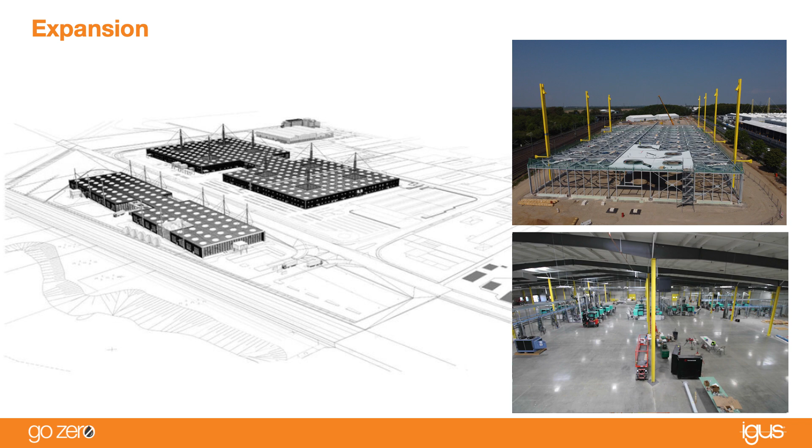We have lots of exciting expansions going on, new production facilities, new storage and warehouses. You can see a video here of a building that we renovated here in Rhode Island. We are going to be molding, and we are molding now, parts here in the United States in Rhode Island, always doing what we can to diversify manufacturing and keep up with demand and reduce lead time for you.

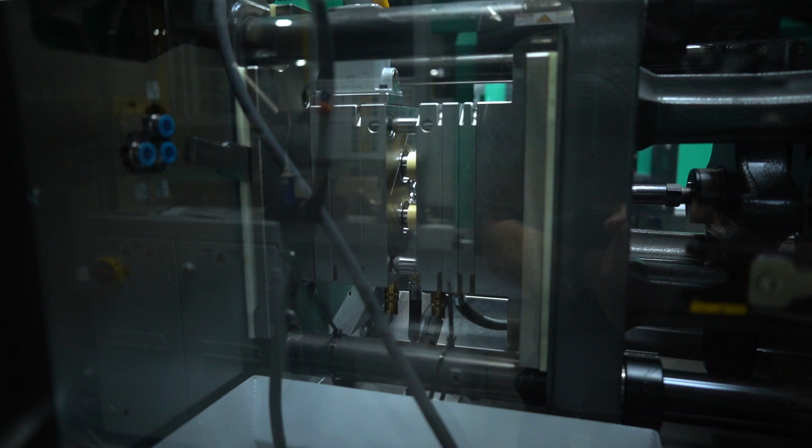Our why, a little bit about our company, our mission: improve all types of motion with motion plastics while maintaining a CO2 neutral footprint with zero plastic waste, and be the easiest company to work with.

As we go through this webinar, please think about pain points and design challenges you've had, especially around movement in your designs. This could be around accuracy, material selection. Cost is obviously a big factor. Wear and longevity throughout your product life cycle, miniaturization, things are getting smaller, noise, vibration, power efficiency—all things that in your day-to-day work as an engineer, you've had some challenges around.

Because that's what we want to try to solve: improve motion. We can help you solve those problems. We just need to know what they are. We just need to have that conversation and understand what you're seeing.

So how do we improve motion? Self-lubricating, no external lubrication required. Corrosion resistant, if you're going to have any wash down, any chemicals. Lightweight, quiet, high wear resistance with a low coefficient of friction throughout the life of this material, and resistant to shock, edge loads, very vibration dampening.

We mentioned CO2 neutral—we take that very seriously here in Rhode Island and in Cologne. So energy savings initiatives, recyclability, our goal to be CO2 neutral by 2025.

And maybe most importantly, easy to work with. We are serving you, you're our customer. We have online configurators, free samples if you're testing or trying something new, predictable service life, and product and industry support.

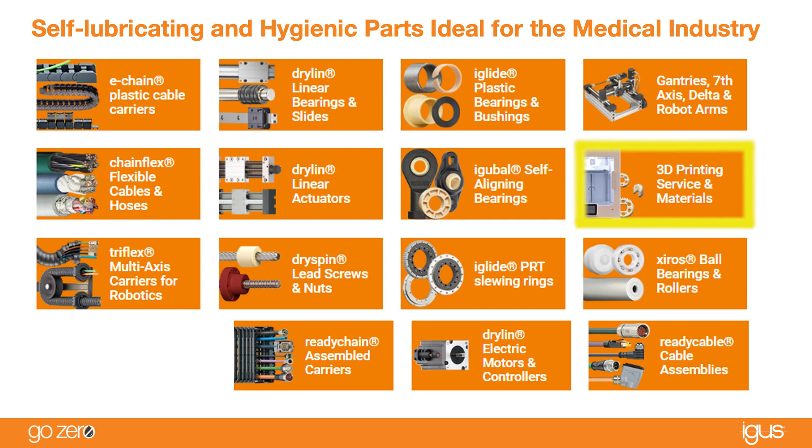dryspin, these are going to be our lead screws, similar to a ball screw for linear motion. Ball bearings for higher speeds, spherical bearings for self-aligning applications, and 3D printed parts. So again, that is very quick, but essentially any mechanical component you can think of where maybe you would consider using a metal part, we offer a polymer solution to that.

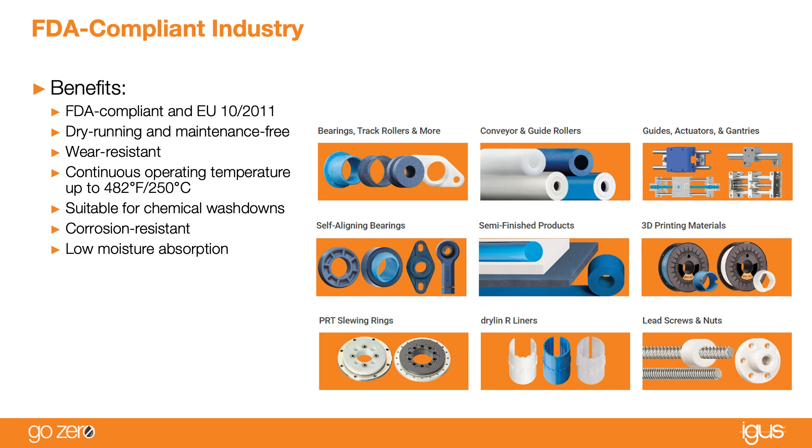We also have a lot of FDA materials in most of our product groups as well. So if you have those FDA regulations that you're trying to hit, or it's going through wash down, being sterilized with a lot of chemicals, we have those materials ready. We also have clean room solutions available as well, up to class 1.

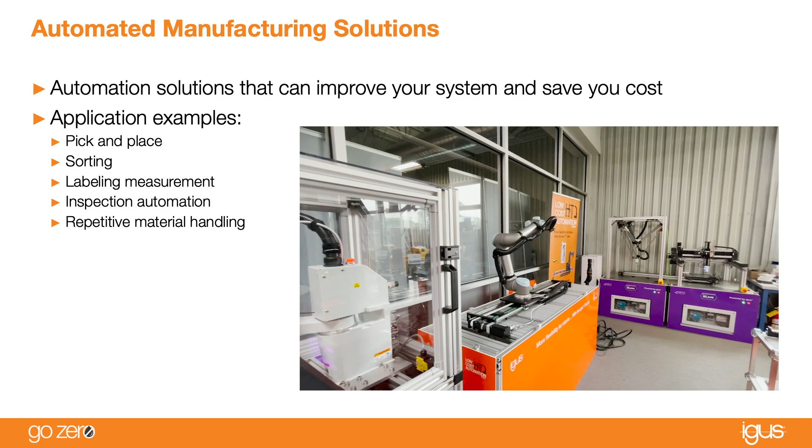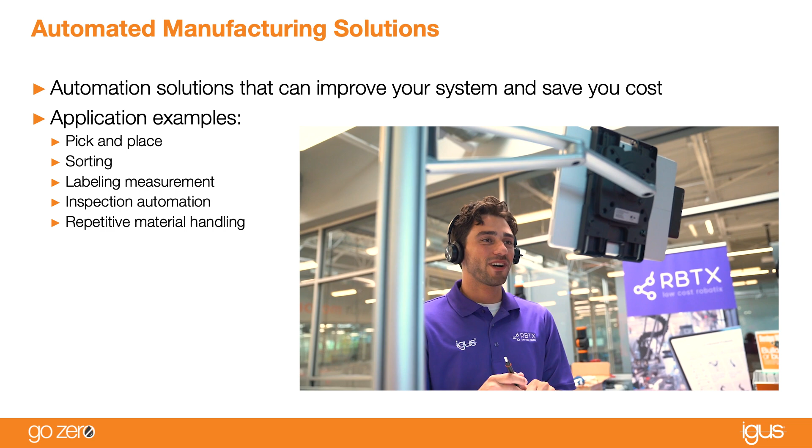The last product group I want to mention is our low-cost automation and our RBTX website. So automated manufacturing solutions, affordable automation solutions, including robots, actuators, gantries, control systems. Common applications are pick and place, sorting, any kind of low duty cycle. These are all made from our standard components, all the same self-lubricating benefits, very hygienic, cost-effective, and scalable. So the idea is we can get you into automation without you having to spend tons and tons of money, and then you can scale up from there.

At igus, we try to be a very innovative company. So we listen to our customers, we listen to their feedback, and we try to implement those changes into our R&D. Last year we had 247 new products.

As we mentioned before, in the medical industry everything is getting smaller, more compact. Your healthcare providers, your surgeons give feedback saying, hey, we need this smaller, lighter. We can help do that. So our new miniature actuators, the SLW 0620, you can get these with a motor on them, with a lead screw, both in anodized aluminum, stainless steel, or anti-reflective black.

We also offer an all-polymer PFAS-free solution as well in those low profile versions. So we're seeing these used a lot in small, compact blood analyzers and applications like that. We're also seeing demand for customers wanting more recycled parts, parts made out of recycled plastics, or maybe they want a CO2 footprint for each component. That's something we can offer - we can tell you what the CO2 footprint is of each component, as well as eco-materials and PFAS-free materials as well.

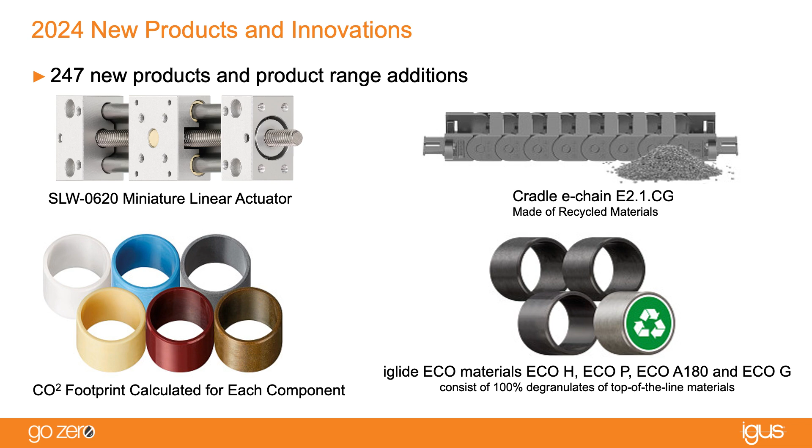So a little about our technology, igus Tribopolymer makeup. We have over 50 materials now that we make components out of. They all start with a base polymer, so that's where they get the predetermined tribological factors, mechanical, thermal, chemical properties of that material.

We reinforce them with fibers to make them stronger. We can handle mechanical loads up to 30,000 PSI in some materials that we have. And then solid lubricants - these are all homogeneously blended together, so the entire part is a wear surface and has that optimized for wear and friction.

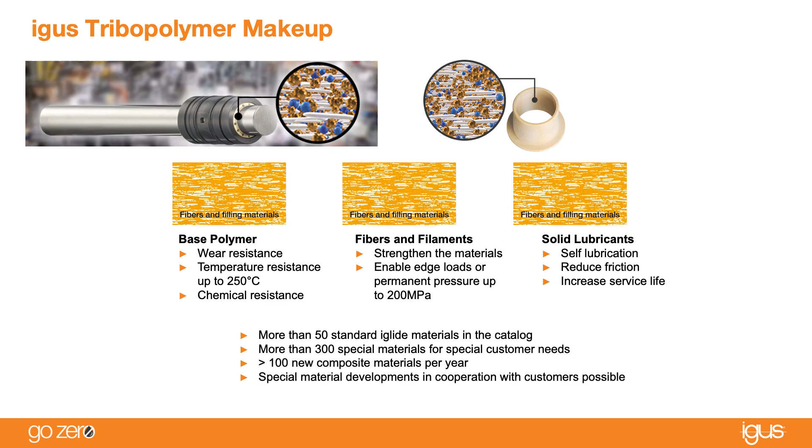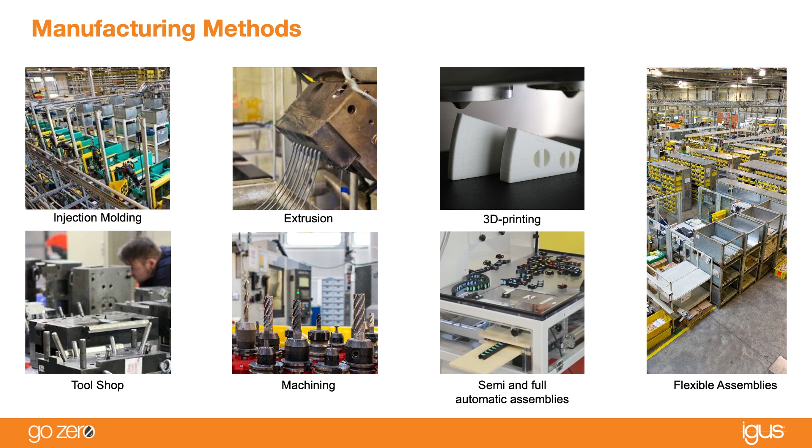Manufacturing methods - a lot of flexibility with the manufacturing depending on your needs and where you're at in your design. So injection molding, serial production, we can keep costs down with our molding. We have raw material that we can extrude in bar stock and plate stock that we can machine into custom parts, or you can purchase and machine yourselves. 3D printed materials, again, of our wear-resistant self-lubricating parts. And then, of course, our machining and tool shop as well.

So custom parts, big in the medical industry, right? You're going to need to tailor things specifically for your customers, for unique applications. We can do soft tools, we can do 3D printing, or we can do the machining. Great for low volume runs or prototyping before you get into production.

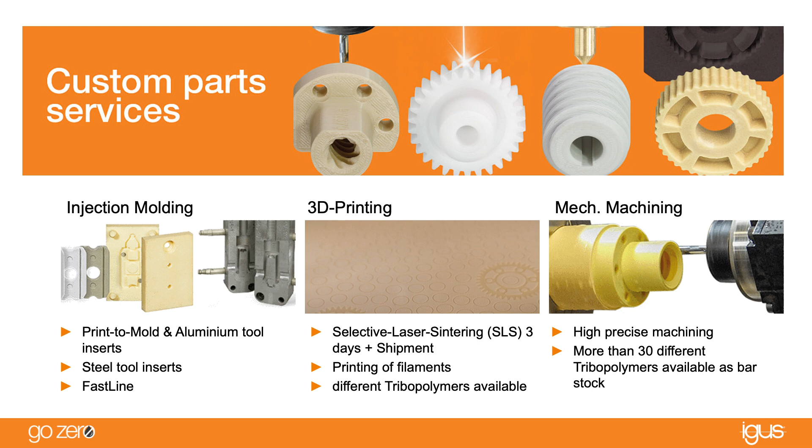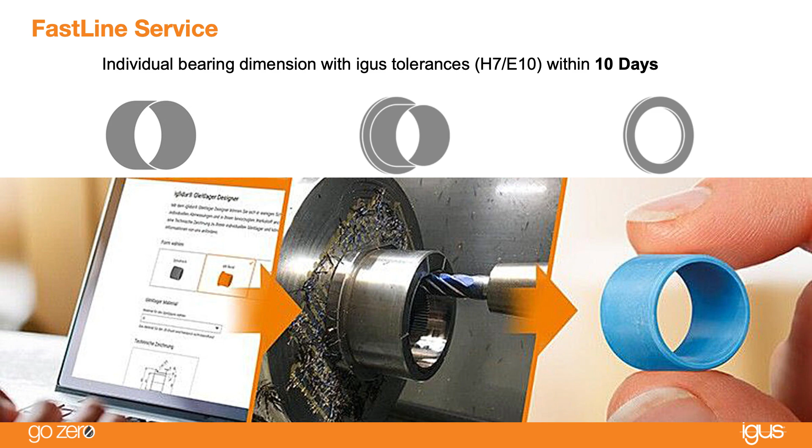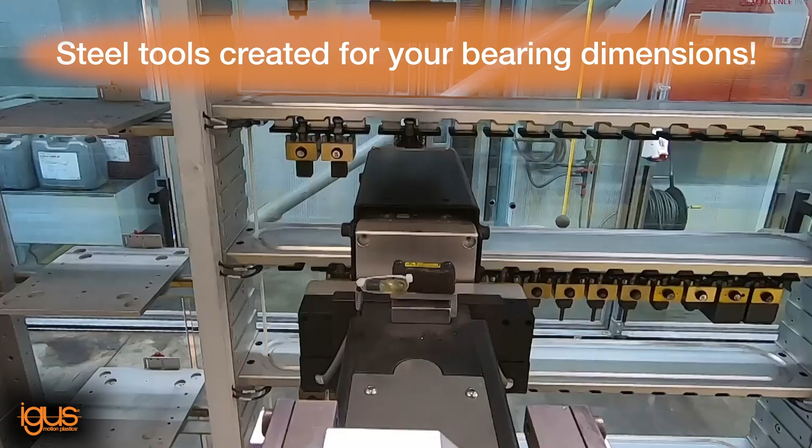And then when you get to production, we can get you to market fast with our FastLine custom tooling. We can get you custom parts - typically this used to take us 16 to 18 weeks. We have automated that process. We can now have you custom parts ready to sample in 10 days. That has been great, especially in the medical industry when you do a lot of testing, you have a lot of design, and then you're ready to go.

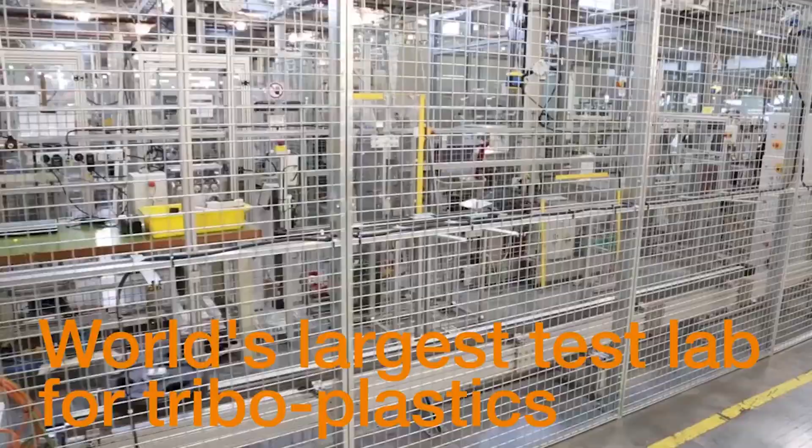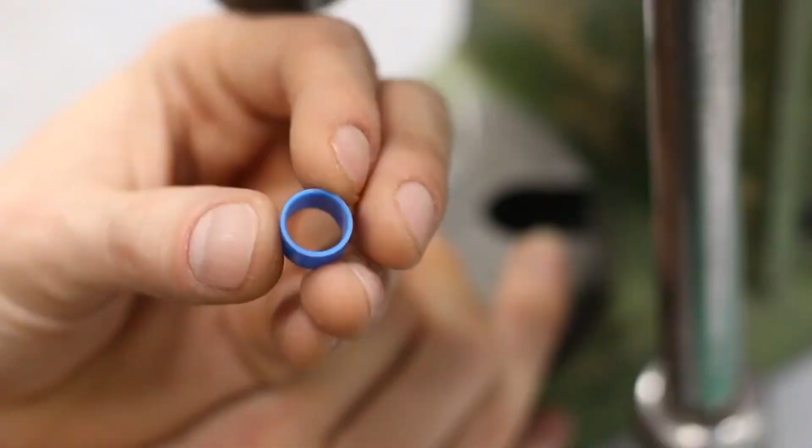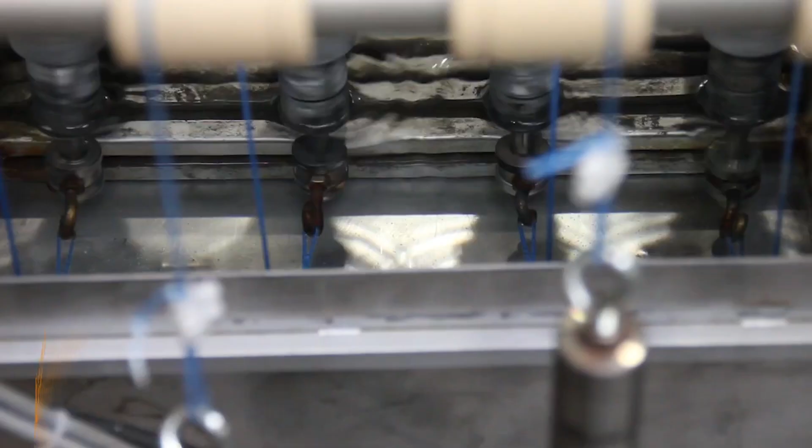When we talk about our materials and the reliability of them, they are tested. When you have high cycle rates, speeds, accelerations, all these demanding environments, it's important that we test. We have thousands of tests that we do every single year in our lab. So when we give you a service life and tell you how long something is going to last, we're able to offer a guarantee on that, and you know that's coming from this lab, not theoretical from formulas, it's actually coming from our test lab. It's the largest tribopolymer test lab in the world, and it's REACH, RoHS, and ISO 9001 certified.

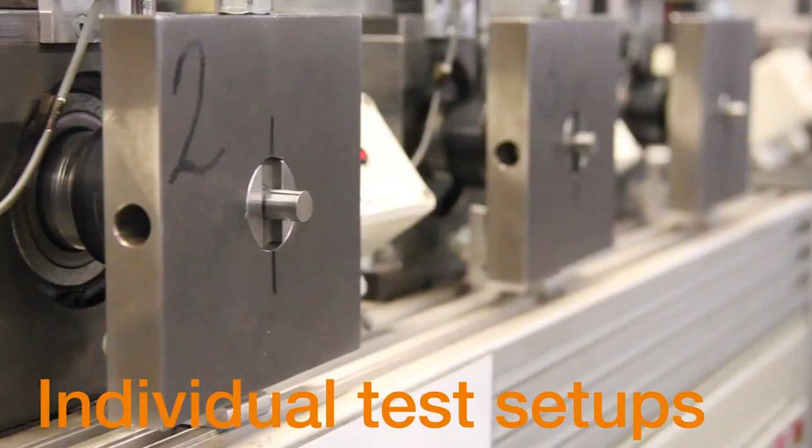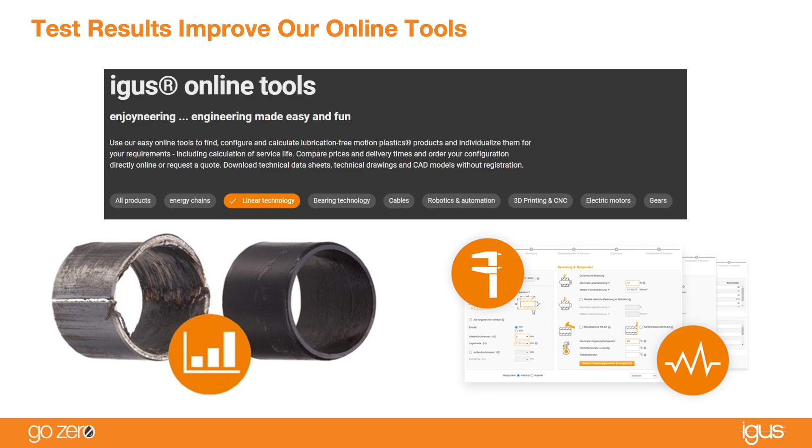All of that information goes into our online tool. All of our components have configurators. You can go on, put in your application information, and we can point you in the right direction and give you a service life so you know it's going to last as long as it needs to.

One of the main benefits we've talked about is eliminating lubrication. There are some obvious reasons for this. Lubrication gets into the environment, gets into the drinking water, and it's responsible for 54% of bearing failures, whether that's lack of lubrication or improper maintenance, as well as the overall cost of lubrication and the downtime it takes if something were to go wrong.

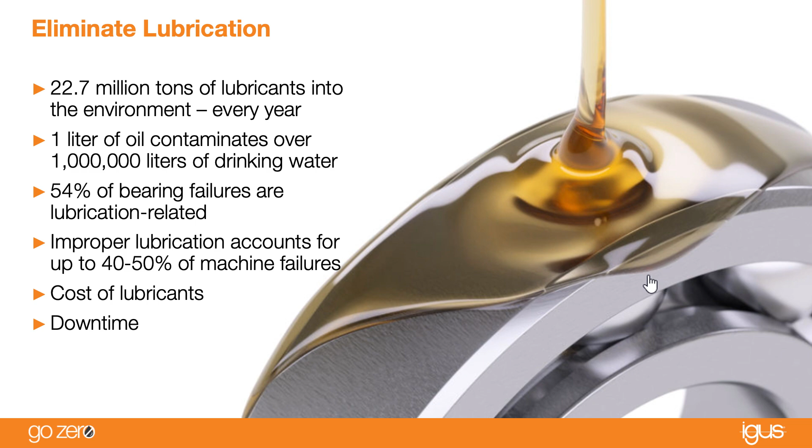Take that out with our self-lubricating hygienic parts, ideal for the medical industry. Dry running, grease-free, maintenance-free, hygienic, low vibration, very quiet—these are all benefits you're going to get, as well as being able to handle high loads and long life, and also be cost effective.

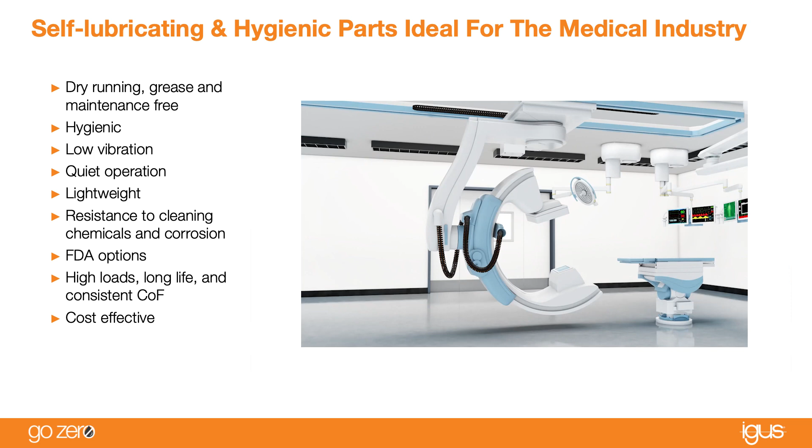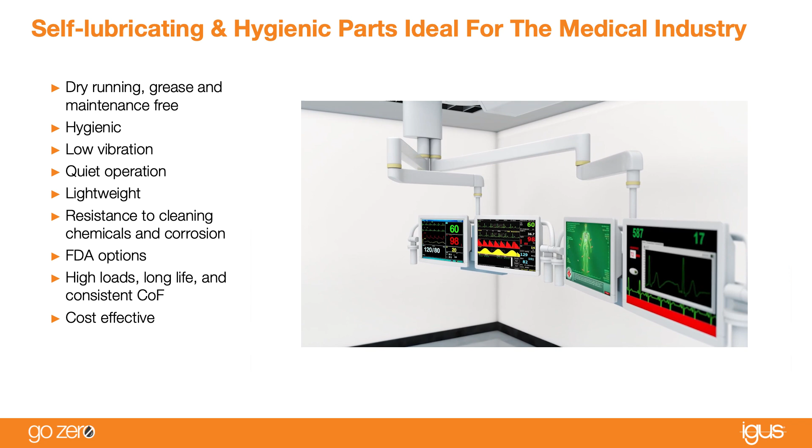So why would you need these? It's going to improve patient comfort and safety, enhance mobility in moving parts, increase efficiency in components, operational reliability, durability, and consistent performance. And of course, cost effective—the parts being molded are going to be more cost effective than machined steel parts, and you won't have the cost of lubrication over time, or the cost of downtime for maintenance.

Medical industry technology, a few application examples. This is going to be very broad because we serve so many different market segments within medical, so please think about what you do specifically and where we might fit in. I'll try to show you some examples—lab and analysis automation, pharma, biotech, clinical.

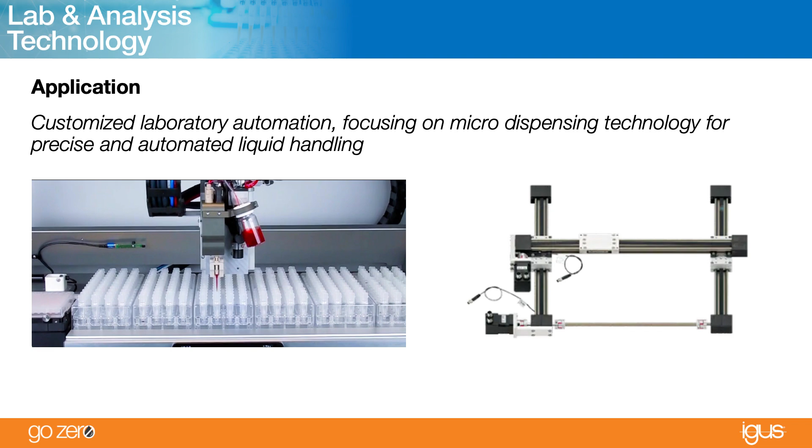This specific one is a customized lab automation, micro dispensing technology. Their requirement is a demanding system with strict chemical, hygienic, and high purity standards, while being compact, efficient, and capable of various liquid volumes with high accuracy. A traditional manual method is very time consuming. With this solution, we're able to be much more efficient with time, but cost effective compared to an industrial application where you don't need that level of accuracy. The system could handle up to 1,400 bottles per cycle, with accuracy of plus or minus 1 millimeter.

Other lab and analysis applications include diagnostic machines such as microtomes, centrifuges, and pipetting robots. They require high speeds, compact, automated designs. With centrifuges, plain bearings can be on the rotor support and motor shaft, and they're also very vibration dampening for compact machines rotating at high speeds.

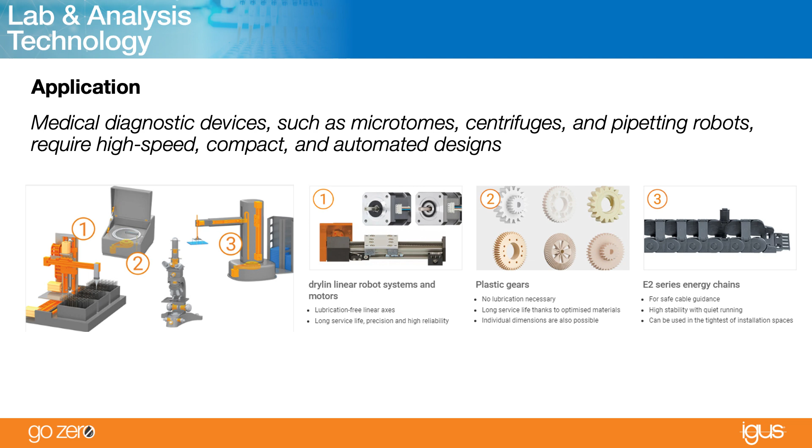Linear motion systems—bearings are commonly used in linear motion for lab automation and equipment, pipetting robots, sample handling, and liquid dispensers, enabling precise and smooth movement, accurate positioning and handling. Pick and place robots, as well as conveyor systems, use bearings as you're moving things along the process. So a lot of opportunity in lab automation.

Medical furniture, functional furniture that's going to be moving—hospital beds. It's important that they're very quiet for patient comfort, with jerk-free movement and easy operation for the providers of side rails, resistant to cleaning and sterilization. This needs to be done with the chemicals, electrostatic charges, a lot of safety involved, and needs to be wear resistant throughout the life of that component.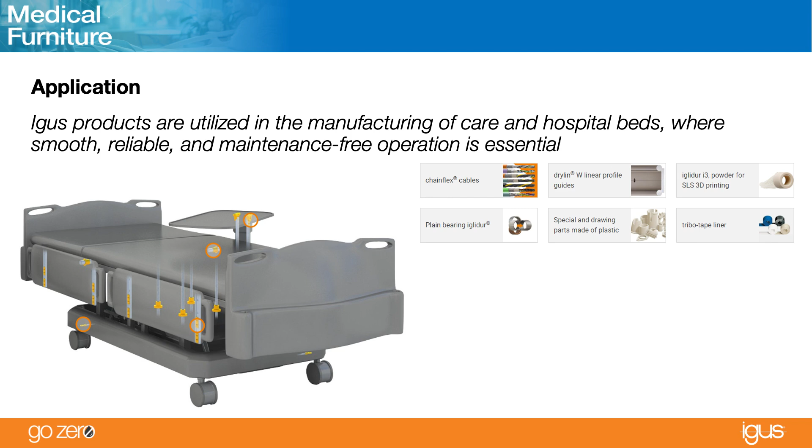So the igus solution: durable components that are going to help enhance the smoothness of operation, prevent textile soiling, with no grease involved.

Custom solutions available if you're going to need that. Tilt mechanisms, adjustments, motor assemblies, all areas where there's going to be movement, and we have components that are going to be able to meet your needs there, as well as motor couplings.

But again, cost effective. We know that hospital beds can be a very price sensitive market. So maybe you have an older design that's already had things spec'd in. We can offer a drop-in replacement or a custom solution to reduce the cost without sacrificing the design capabilities.

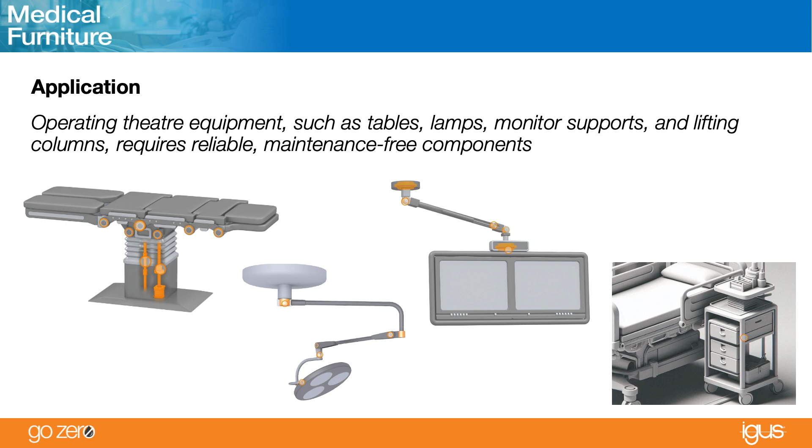Other furniture, again, surgical tables, lamps, monitors, carts. These are moving every single day. They're oftentimes being wiped down with some sort of sterilization. So you're going to want something that's not going to have that lubrication dry up with all those tilts and movements, and it needs to be controlled. Being able to control that is very important in those medical furniture applications.

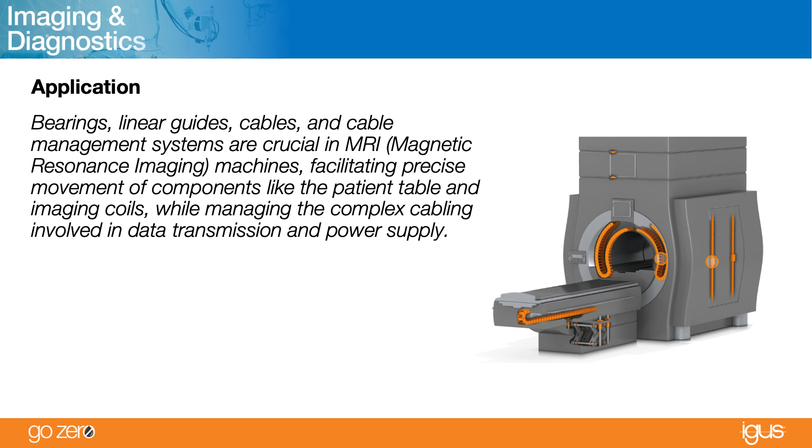Imaging diagnostics, a growing industry. Lots of moving parts in it: bearings, linear guides, cables, cable management, crucial in MRI machines, like the patient table and imaging coils. You're going to have a lot of those cables moving around, and you want those in place. You want something that's going to be magnetic free. That's a big common industry for us with MRIs. Traditional metal components are going to cause interference in those systems and can lead to signal loss, and we're not going to have that with the polymer versions that we have.

Many sizes and geometries available, so you have other types of imaging machines from very small infrared or ultrasound type devices all the way up to proton therapy, where you're going to have room-size components. We have solutions for those.

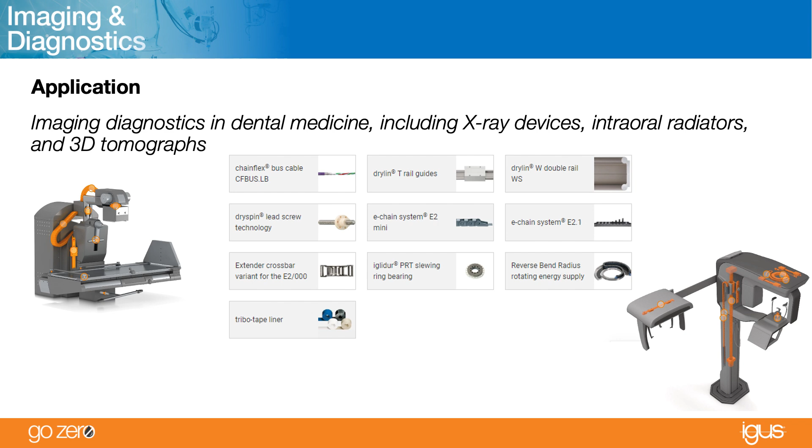So X-ray devices, radiators, tomographs, again you need those things to be durable throughout the movement of that. You want them to be quiet. You don't want your patient sitting there hearing those noises. It's already a vulnerable time for them.

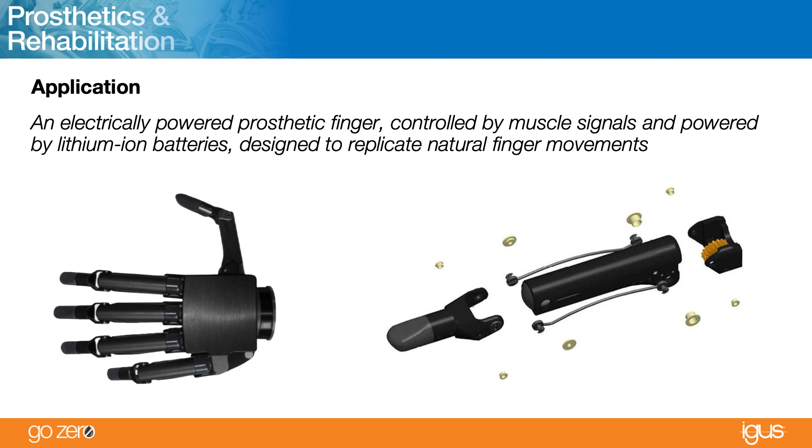Same with joints and legs and knees. You want it to be natural, smooth throughout the life of it. You don't want it to be tight one day, loose another day. You want to know what that's going to be. Being able to get that custom fit and give you that service life, that's something we are able to offer in applications such as these.

Also, these are going to be maybe wiped down, and they're going to be outside. So being in those environmental conditions, being resistant to corrosion and chemicals is also very important.

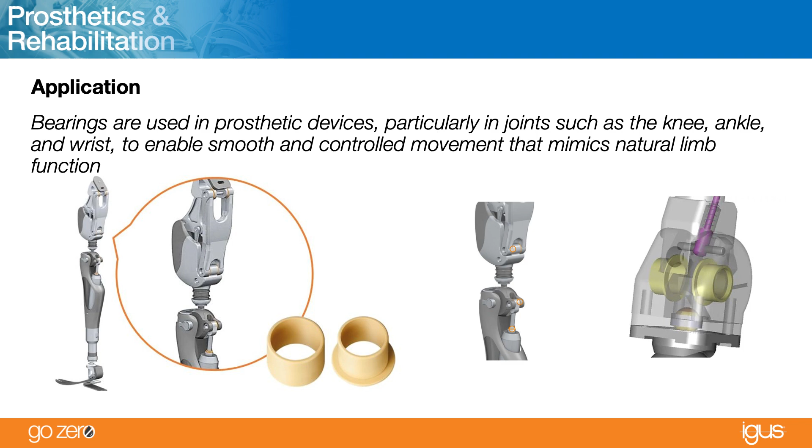Same within wheelchairs, right? This allows people to get out, move around, access areas. You see now a lot of wheelchairs that can go off-road in dirty environments. There's a lot of adjustments on them. They are almost like cars and vehicles now. From electronic adjustments, head tilts, backrests, you can see a number of our components that are used for the sliding.

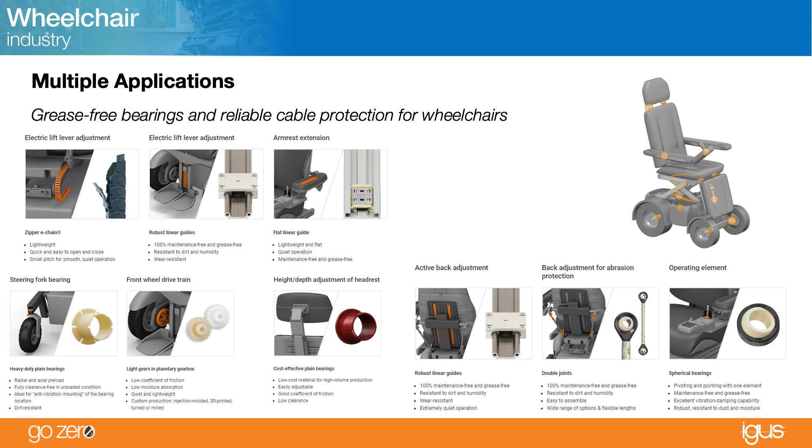Also with medical wheelchairs, again, can be very cost effective. We have a lot of material options. So if you need a heavy duty bearing in one area for like a motor mount, we have that. But if you just need a cost effective solution, like our drylin or our iglidur R, which is that red bushing you see there, very cost effective, usually meant to replace Oilite bronze bushings.

So where do we go from here? Again, a lot of applications that we can help with.